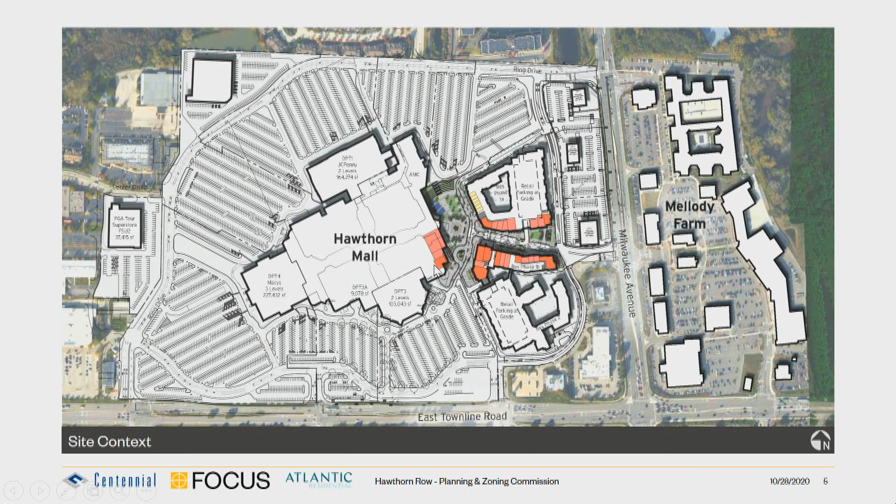So Torti Gallas Partners became involved and did a bit of a peer review with the previous plan. We looked at a few different components that we felt, from our experience of creating these types of environments, would help improve the general layout and the framework.

First of which was trying to improve the mall visibility from the entrance coming in off Milwaukee. The one shown at the bottom of the screen is a critical vista coming into the new mall entrance. We also tried to create a better drop-off sequence located at the outward-facing retail of the mall, encouraging pedestrian connectivity, but moreover, trying to create a great placemaking district.

Wherever you have retail with housing above, it's really important to create outdoor spaces that are sort of outdoor living rooms for the residents upstairs. So we intentionally dogleg the buildings to create parks and amenity areas along the main street coming in. We also pulled the garage for Phase 1 - you see the line designated Phase 1 and Phase 2 - further east such that there's less vehicular traffic at the throat of the mall.

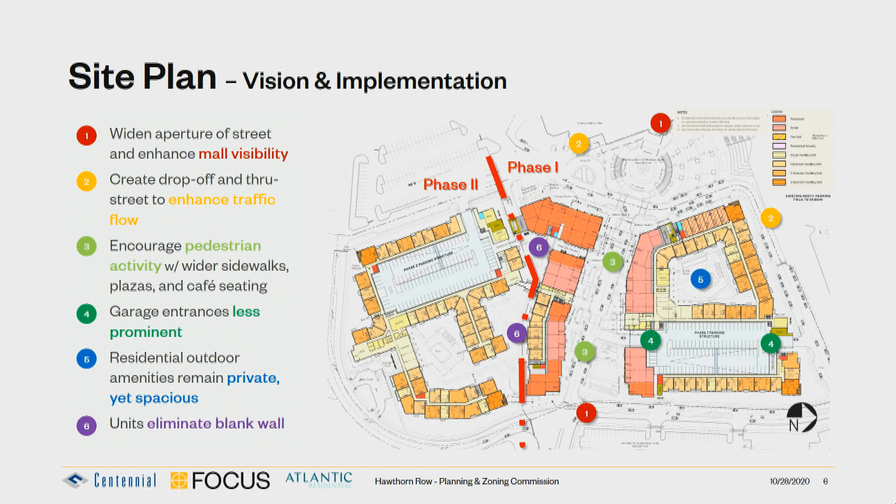We've also looked at the residential courtyards, certainly the one on the AMC side, closing it and making it a bit more private to the residents who will live there. And then lastly, the previous scheme had a more or less blank wall on the south side, so we've created a two-sided building there on the south side of our main street. And then you see the Phase 2 building on the left side.

So Phase 1 is composed of two buildings that are connected with a pedestrian resident bridge on level 4 across the main street. We studied this and tried to create a dynamic space that still has visibility of the mall signage and the mall tenants on the front of the mall.

Phase 2 then is taking over the parking lot that's south of the Phase 1 building, and we're incorporating another parking structure into that building to account for that parking. Phase 2 is connected via essentially a passageway here, so that the Phase 1 and Phase 2 buildings for residents will be linked, allowing folks to come out and engage the main street.

So what you're seeing is the red, the darker shaded red, are what we anticipate being restaurant users, mostly the end caps, and the lighter shaded pink would be retail shops. The yellow is basically representing ground floor residential units, and on the west side... can you guys see the cursor? Yep, okay, it's hard to see up here, so I apologize.

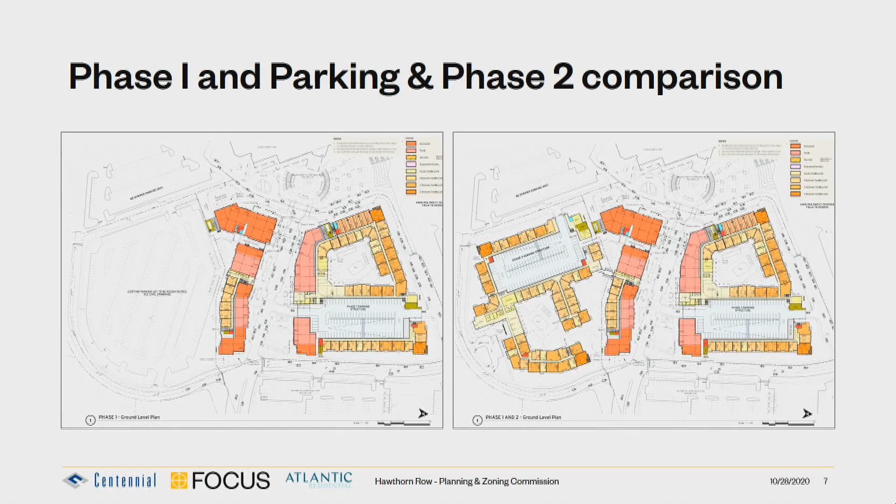So we looked at a lot of precedent images to have a dialogue about what these buildings would want to look like. Mellody Farm across the street is more of a traditional sort of adaptive reuse.

The mall itself is a bit of a blank slate. Since we're taking down the Sears, we can create what we want on that facade. The image highlighted in yellow really resonated with the design team and the development team in terms of being a quasi-warehouse building with a contemporary bent to it. So we felt this would work in this area given the context of what's around the property.

And in that you see - sorry, my mask is sliding - you see some larger window openings, which will show up in the renderings. And then the notion of an expansive glass, which shows up in a couple of places, both in the Phase 1 and Phase 2 building, to try to go more in a contemporary type of approach with the design.

We are not this tall, so the building doesn't look this tall. We are 4 stories instead of 6, but this was the image that we felt resonated most with everyone.

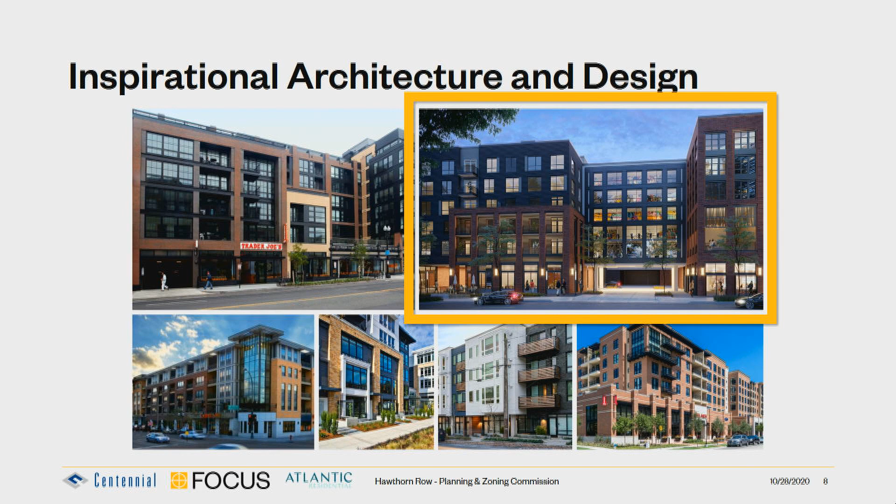In terms of the materials, we looked at a lot of different things, but we came up with a palette that we feel is durable. We've got essentially four different brick types.

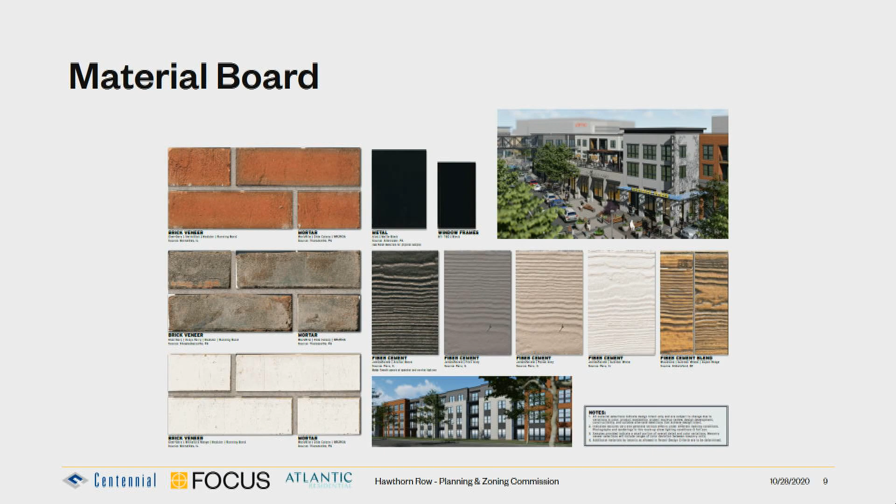So we have a series of 3-story pavilions, some of which are the white brick. We use the red brick, which you'll see in the renderings, for the end caps of the building primarily. And then we use a combination of the fiber cement panels - a dark panel, medium gray, light gray, and off-white - and then what you're seeing that looks like wood. This is essentially the underside of the soffits, so it's sort of a warm tone as you're walking down the street.

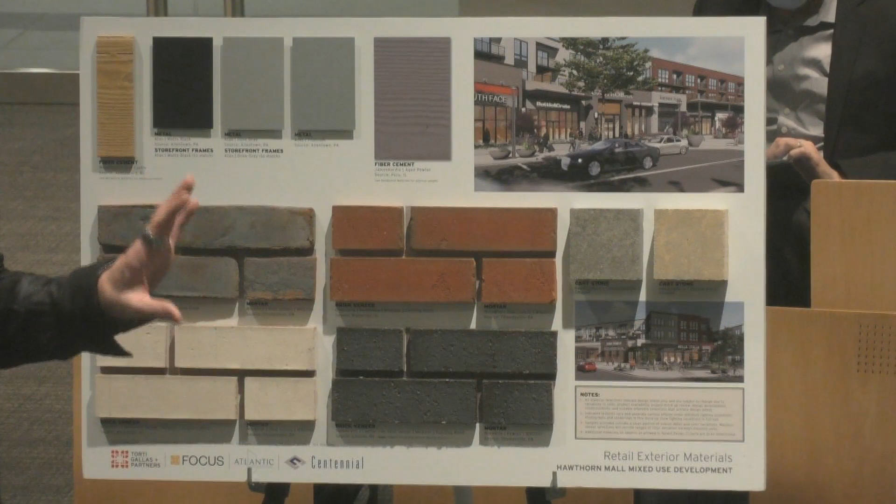So the palette is pretty simple, I would say. But what we've done in the architecture is tried to break it up so that as you're walking, you engage different facades along the way.

So in terms of the public realm, I guess I can turn this off. We had a series of images that we looked at - again, precedent images, things that are already built elsewhere that resonated with the team in terms of the environment we were trying to create.

So you see landscape, you see hardscape, you see really great places that you want to be, and it's all of those details that come together. It's the pots, it's the lighting, it's the signage - it's all of it coming together to create a great experience for guests and residents alike.

In terms of placemaking, you'll see we have a grand plaza in front of the new mall entrance where the Sears stands today. The notion is great outdoor spilling cafe tables, a rich landscape palette, paving materials, and amenities throughout, not only on the street itself, but within the residential courtyards as well.

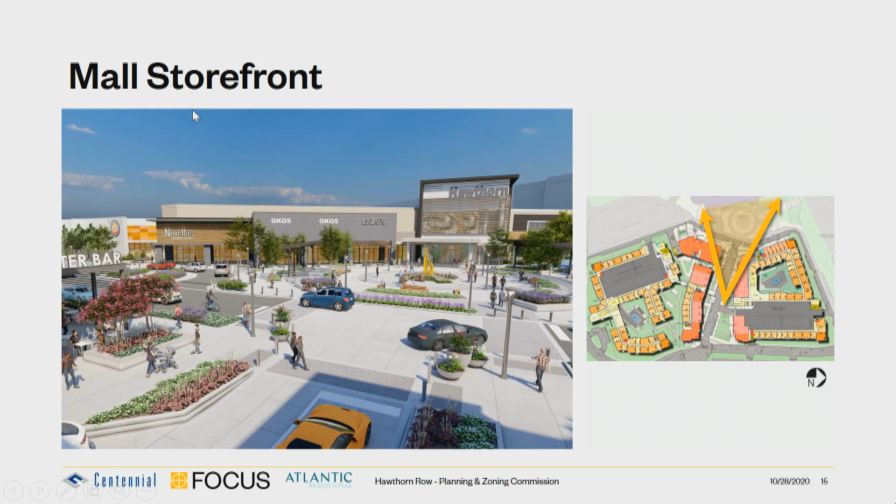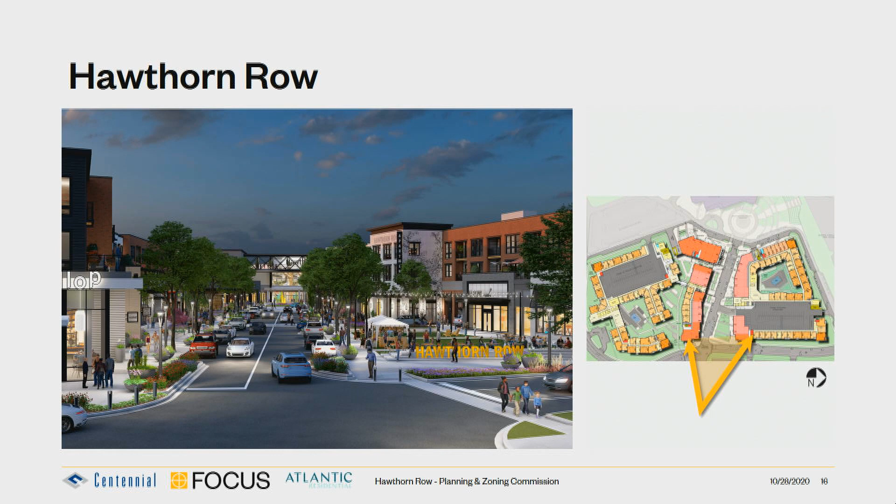This is coming a little bit closer in, and this highlights the multifamily entrance and lobby on the right side. We do have a vertical sign, maybe the notion of a painted sign as well, which would be a marker for the apartment, whatever that name ends up being. And then you see some mural, some artwork along the side.

This is the entrance into the garage, which has been pushed back further east down Main Street than previous. And this is the protected pedestrian pathway leaving the garage, coming out to the leasing office and down the street. So it's really, you park the car once and you're able to stroll past the shops on your way to the mall, versus the old plan, which had the garage much closer to the mall, therein kind of missing the shops if you're going to the mall.

And then you see, again, lots of landscape, lots of pots, some great pedestrian scale light poles, and you begin to see the terraces up above. This terrace here in particular is a community terrace for the residents. The other terraces on the other side would be private terraces for the residents who rent those units.

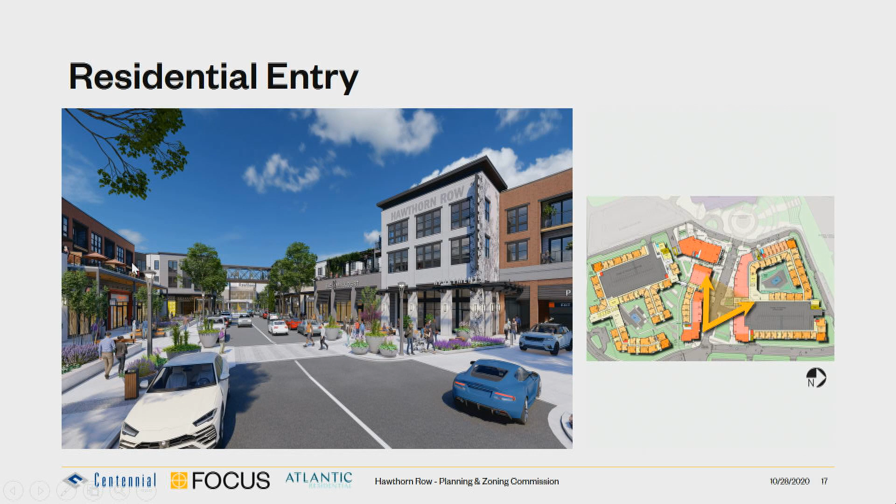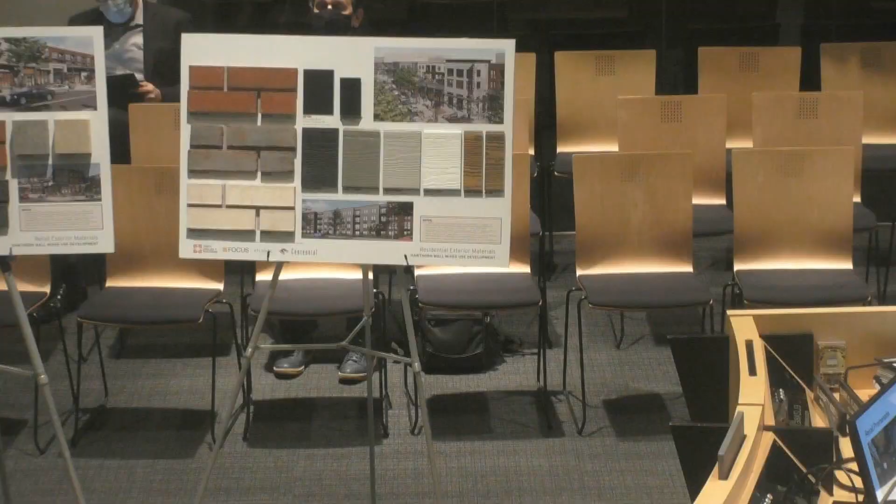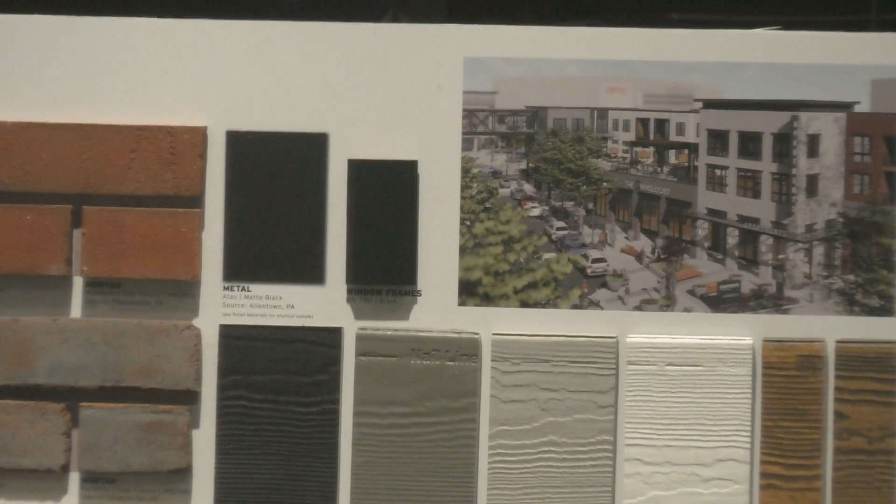And that was what I was talking about here, that would be this material with recessed downlights, and that's common throughout the project. Tenant blade signs as well, located here. Great storefront signage, and really just trying to create an active sidewalk, one that's populated, one that can have cafe, flipboard signs, and a very rich environment with plenty of seating along it.

So we switch now to phase 2. For orientation, out here would be Milwaukee Avenue, and this is the main street coming in. So this is really an aerial from the corner of Town Line and Milwaukee, looking northwest. And this highlights the phase 2 building.

The exhibit earlier that showed phase 1 versus phase 2 showed that this is a surface parking lot until phase 2 is built. So in phase 2, again, we take the front side, which really becomes a courtyard experience once this is built. And this little drop-off sequence here is for the phase 2 building.

You notice the entrance to the phase 2 multifamily product is very similar to the entrance to phase 1. So there are cues along the way for folks who are trying to navigate. Obviously, there will be wayfinding and signage as well. But we thought it important to try to create architecture that didn't feel like it was two different projects, but something that was more holistically designed.

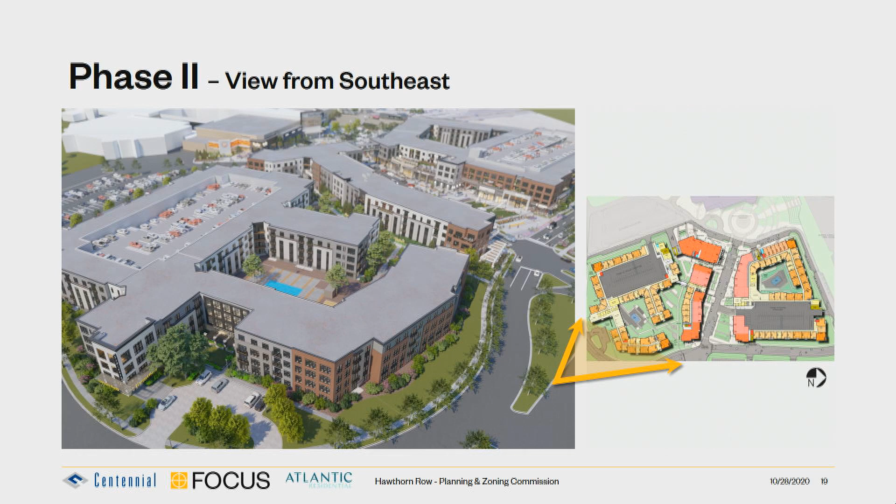Now we're going to turn around a little bit further. So this is more of the entrance coming in from Town Line Road. Again, the use of the red brick, the more traditional look, but with larger warehouse openings on the corner of the building located here. This is the drive lane coming into the new mall drop-off, located here.

But what we've done is we've updated, we've added a lot more of the lighter color Hardie panel to get it to pop a little bit, which I think plays off of the darker gray Hardie board or fiber cement and the red brick nicely. So it has been sort of freshened up, updated a bit to have a little bit more punch, a little bit more contrast as well.

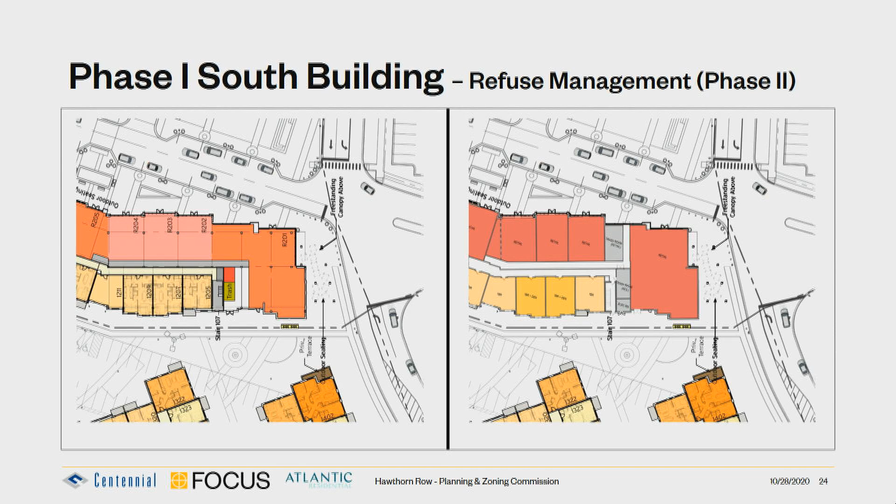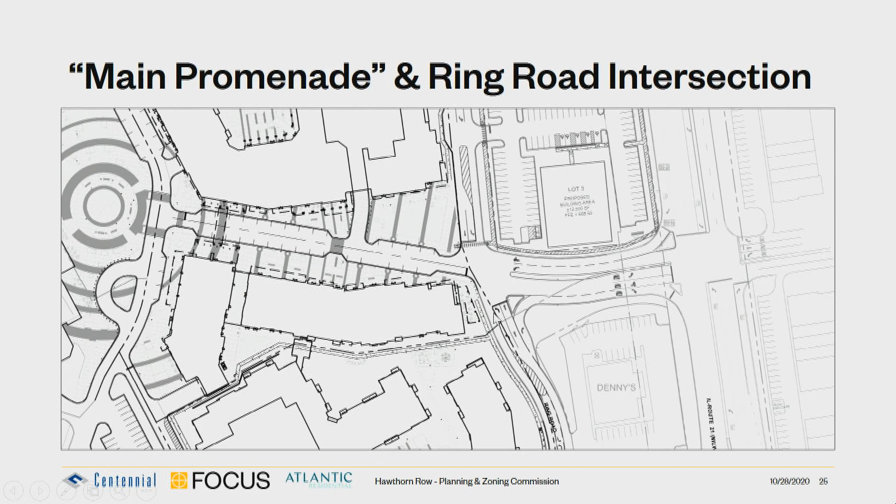With all the things we've heard today, we ask for your recommendation for revisions to the special use permit to grant a PUD modification, the variation to the zoning ordinance and sign code identified in the staff report, as well as preliminary and final site plan approval for Phase 1, Phase 2, and the main mall plaza, as well as preliminary and final landscape and architecture for the same elements. Thank you.

Okay, anything else from your standpoint at this juncture? That'll conclude the presentation from us. Okay, any questions from anyone on the commission? Jeff?

I just want to say I think the project's fantastic. I love the pedestrian experience you've created, not only for the mall, but for the new residents and people visiting the new little main street there. I love all the terracing, just from the ground up, and then the private terraces for the apartments. I think that's great—it's going to be a phenomenal experience for those residents. You've got the two different private courtyards for people who want a little more privacy, even the terracing from the theater down to the little band shell. There are all these little nuances that are really going to make this project successful. I think as a village, we're pretty lucky to have this here. It's probably the nicest project we've ever seen, probably also in the county, and probably beyond around here.

You know, this is amazing, by the way. Thank you. It's exciting. Is there a way that at some point something can be built to connect this with Melody Farms, without having to get in your car and drive over, or try to run across Milwaukee?

Well, one thing we do have in place is something we contemplated at the time of the Mellody Farm development, which was connectivity between the malls. At Ring Road and at the access drive adjacent to Denny's right now, those intersections aren't making any sense.

At the time of the Mellody Farm development, we required that an escrow account be created, with an amount of about 100 or 150,000 deposited into an account the village holds. In the future, when the mall redevelops, which they're doing now, that money can be used to reconfigure those intersections for more logical traffic and pedestrian movements. Our village engineer is working on approvals through IDOT concurrent with the development being presented tonight.

What about some type of pedestrian bridge that can take people over without having to get in their car? That's probably really expensive. There's a couple things to consider: ADA compliance gets in the way, since you'd need an elevator on each side, or trying to keep the pitch in compliance with ADA requirements. It takes up so much land space that it becomes impractical, and the cost involved would be quite steep.

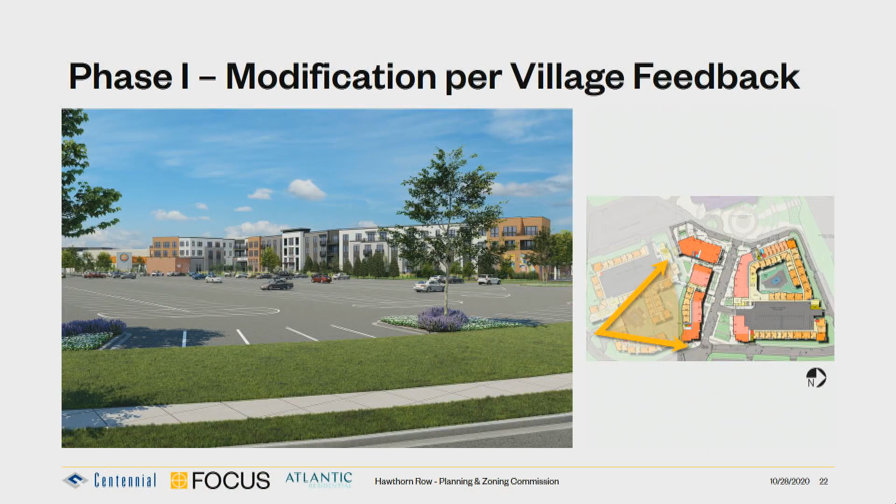Could you show this picture again, without the overlay in the middle of it? Which one? The picture without the overlay. Nobody explained to me how to do this. But there's only two ways to go. I feel good about what's going on, and I like having Vicky with me. Whoop, back one more. There you go.

Phase 1 is the building on the right -- is it also the first building on the left? It's the entire building on the right, and also this leg of the building on the left. The intent of the combination is to create the full Main Street for Phase 1. If we didn't build this building, you'd have half of a Main Street and wouldn't be able to create the place for retail. The bridge that the other commissioner was concerned with is in Phase 1, and the primary purpose of it is to allow residents on this side, call it Phase 1 South, access to the parking garage on Phase 1 North.

Speaking of the parking garage, will the residents have reserved parking? Yes, they will, it'll be assigned. Is that general parking for the mall also? The first floor will be parking for the retail. And then they'd have to use some type of access badge or gate to get in? Yes, okay, perfect, thank you.

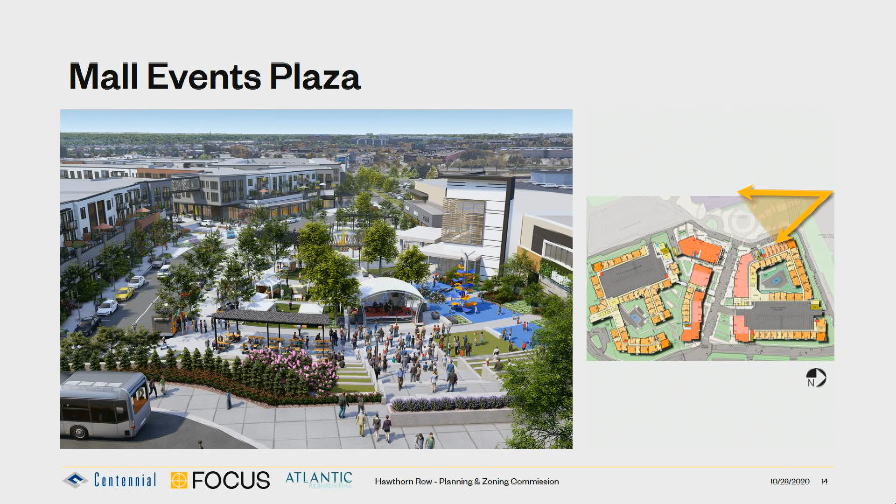Thank you. Okay, do you have a copy of the staff report? Yes. With you? Yes. Since you're asking for variations and we need to have a record of that, if we can just go through those quickly.

The first thing we're asking for is a variation on dwelling unit size. We had a substantial conversation, I guess a week ago, on dwelling unit size as it relates to the ordinance. Your proposed one-bedrooms are 38% less than the permitted. The two-bedroom is 25%, and the three bedrooms, which I know are not a lot, are 18%. Can you speak to either A, the necessity for these kinds of sizes, or B, the outmodedness, if that's a word, of our ordinance?

So as we've developed many hundreds of units over the past decade, we've come to realize that today's generation requires less space because what they desire more is the amenity space. And they like to be out in the amenity space with their neighbors interacting. And so from a price point perspective, this allows the younger generation who can't afford the larger units to pay a smaller chunk of rent for these smaller units, but yet market size and yet manageable. And you'll see in your packet, I believe, the units have been designed efficiently so that it allows also common area within the units, like a built-in desk, a true living room, so that they can actually feel like they have more space.

These are predominantly one and two person households. Is there a cross easement for parking into the mall lots? Yes, there will be a cross access for parking. There's also a variance for the blended parking ratio for retail and restaurant uses.

Currently, the blended parking ratio is 5 spaces per 1,000. We're requesting a reduced parking ratio of 4.41 for phase 1 and 4.16 for phase 2. Those again are market driven.

If you've been to the mall recently, it's evident, I mean, maybe pre-COVID, we won't say recently, but pre-COVID, it's evident that the 5 per 1,000 is not what is needed. When you have a mix of uses, people are not going to the mall to go to a single retail tenant and then driving around and parking to go to another retail tenant or a restaurant. The idea with this redevelopment in particular is to park once and create an environment where people can walk and visit multiple uses using one parking space.

Mickey Walker, civil engineer. So the front yard is Ring Road, on probably the just east side. For this version, the front yard is actually to the south in the smaller map. And then the rear yard is typically along the mall plaza. They slightly vary for each of them.

For the ratio of building coverage, we are requesting relief for both Lot 1 and Lot 2. Lot 1 is your Phase 1 residential. Lot 2 is your Phase 2 residential and also parking field during the Phase 1 condition. Largely, those reductions in the ratio, or the increase in ratio, I should say, is because we're trying to create a more urban environment. Instead of having a massive parking field, we're trying to park within the garage, so therefore the building coverage is greater.

In terms of the setbacks, we've placed landscape beds to the extent possible in order to get the density we're looking for within the apartment buildings. These landscape beds also include sidewalks for pedestrian connectivity, as well as different amenity spaces, especially along the main street, to allow for more congregation amongst residents.

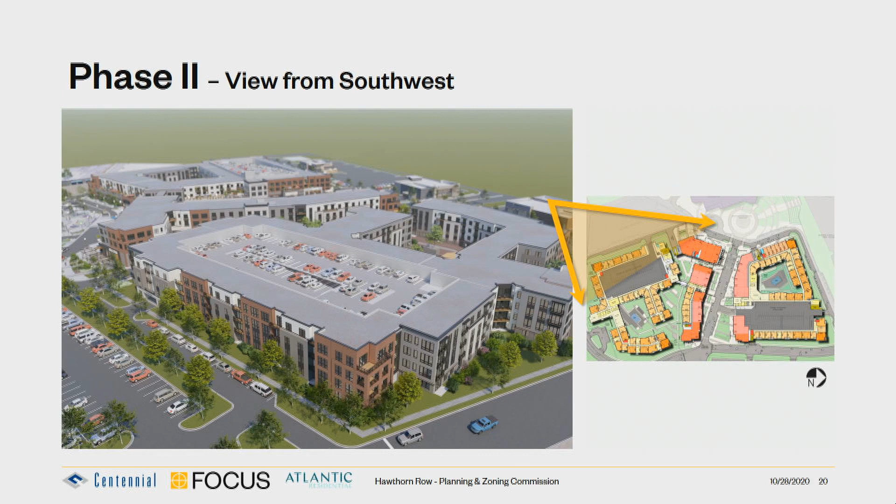And then in order to create that urban feel, we are asking for relief for the building height. Per code, we are permitted 2 stories. We're asking for 4 stories to create this density.

What is the height of the mall? Mike, do you know the height of the mall? It's a 2-story mall, so the mall is 2 stories. It's going to be lower than the 4-story buildings. I don't know what the floor to roof measurement is, but it is a 2-story mall. The department stores are 2 stories, and you're looking at a 4-story residential, multifamily building.

Yeah, I should have looked this up, but I know the AMC movie theater is somewhere a little bit above 50 feet, is what my memory tells me. And then if they can find the right screen, I think it'll give you a good perspective of what it'll look like. Throwing the dimensions out, because of the grade change between where the movie theater is and where the development is, the movie theater will remain looking like the tallest building on the mall. That's a great point, that the grade of the upper level parking lot and the movie theater is significantly higher than the intersection, the main intersection.

Okay. What about the sign code variances? What are you asking for there?

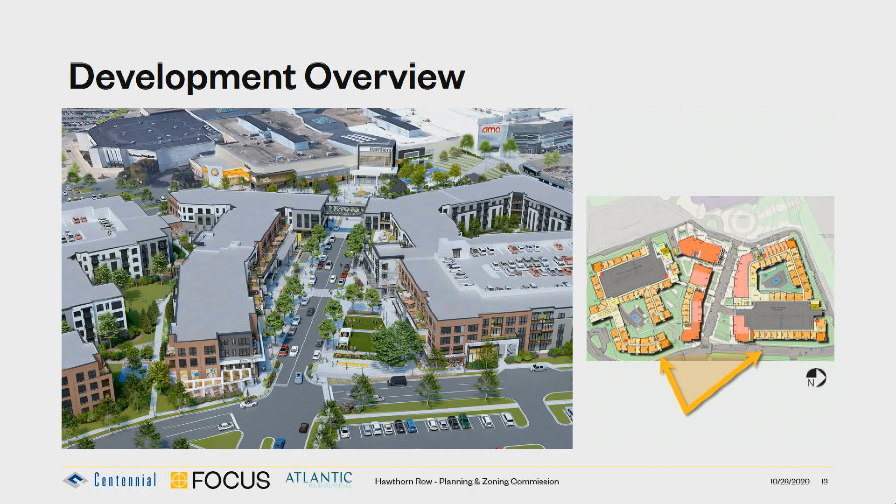So we created this signage package looking primarily at retail tenant signage, much like at Mellody Farm, needing an increase for the retail tenants in terms of the size of the signs, what they're going to be expecting in a property like this.

The other thing, I don't think we increased... haven't seen it in a bit, but I think it was about a 50% increase in some of the signs. Do you have the staff report? Yep, well, you do now.

And then the other consideration was for the end cap tenants that are on a corner, to allow for signs on both of their facades versus just one facade.

We're also looking at a variety of signage that will be building mounted and awning or canopy mounted as well, such that it has some relief. So we have blade signs, which show up here. And then on some of these canopies we have signage, and others would be surface mount, internally illuminated signage for the shop fronts.

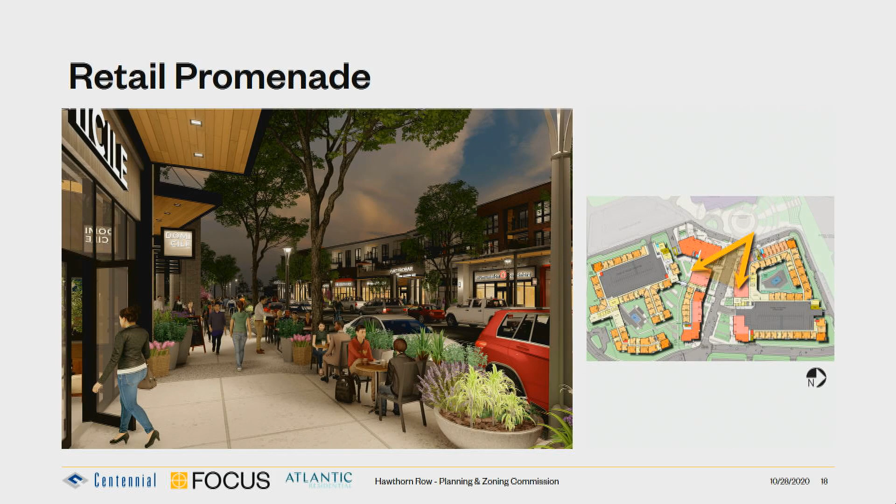We're also asking for open channel letters, a little more. I think in these types of environments, the more variety of signage you have, the more authentic the place feels, versus having a criteria where every sign appears as though it's the same sign.

Not it, wrong package. I'll get rid of this. It's not forwarding. Oh no. Uh-oh, you broke it, broke it. We're gonna have to wait here now. Oh, there it goes.

So this exhibit here shows the different types of signage that we're hoping for, and we hope that the tenants express their brand through the signage.

We'll go back to that one. Are you suggesting, though, that the retailer on the right would have one, two, three, four, maybe five signs? No, these are just different locations that their sign could exist within.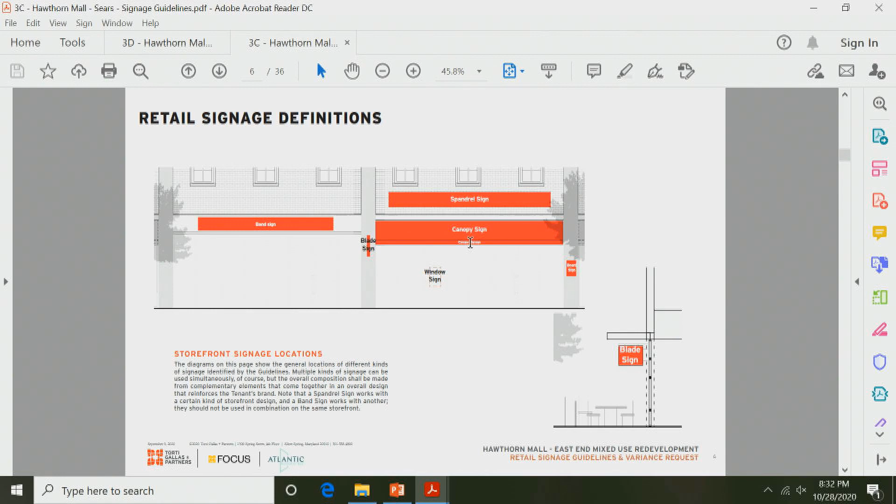So then when you say to allow more than one wall sign per tenant facade, you're talking about multiple signs per facade? For the tenants that are on the corner of a building, although their primary entrance is on one side, they may have entrances on both, so we're suggesting that they would have a sign on either side. That was typical, but that's one per facade. One per facade. But this reads more than one. That's what I didn't understand.

Vicky, could you get to the screen that shows where on the facade a sign is permitted to be located? They have the elevation. I think I can help out a little here. In the back, it's window boxes on the screen. Is that the storefront? It may be, and it's in your packet as well. Corner unit, there it shows.

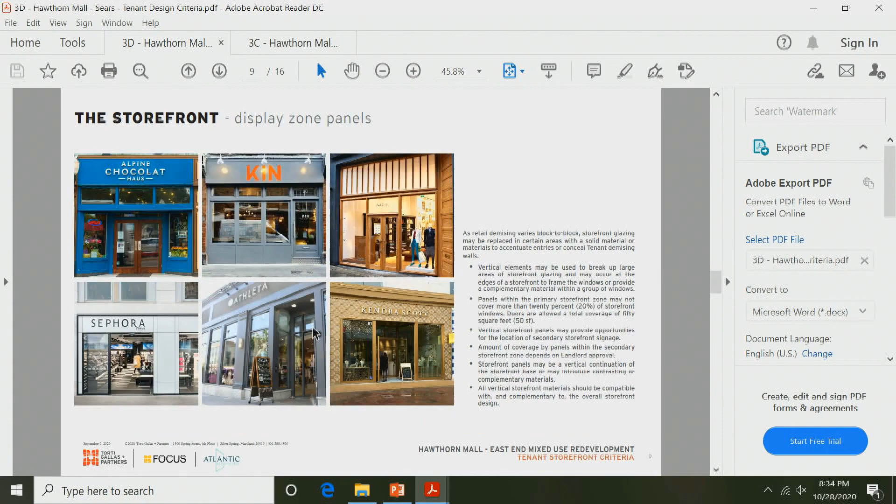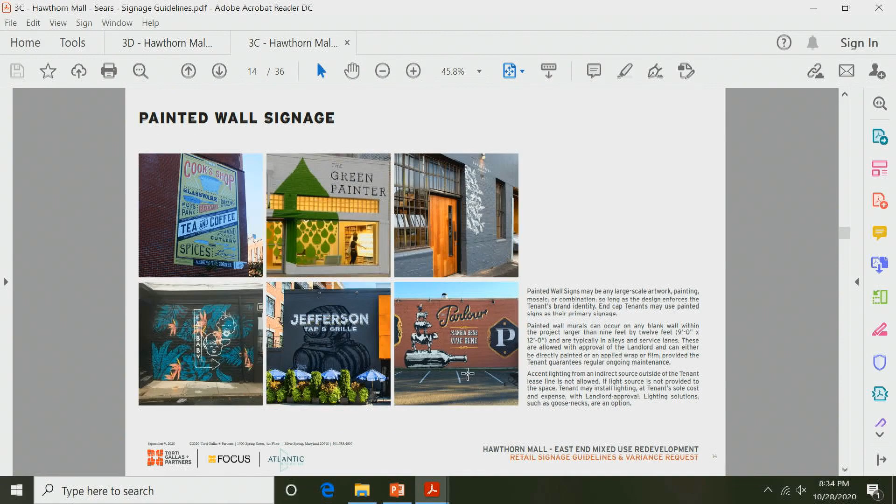The pictures just illustrate what's encouraged and discouraged. Did I pass it? To me, I think we need to flip back. I'm sorry, Mickey. 21. Oh, I can't see the page. Oh, here we go. There we go. 18, 19, 20.

There we go. Okay, can you get a little more of the streetscape involved so we can see more? Each one of those boxes there, that's the specific area where a sign can be located. There can be one sign within those defined locations. So there could be a situation where there's a wall sign outlined in red, and then if they happen to have a canopy sign, there could be signage on that as well. But it's not to say you could have unlimited signs. Right, so it's one sign per defined location.

In addition to that, a window sign or a blade sign would not count toward the overall size limitation, because from staff's perspective we think blade signs are cool. And then there's also some allowances for sandwich board signs, banner signs, and other such temporary signs. But it's not to say you could have that many signs on each tenant elevation.

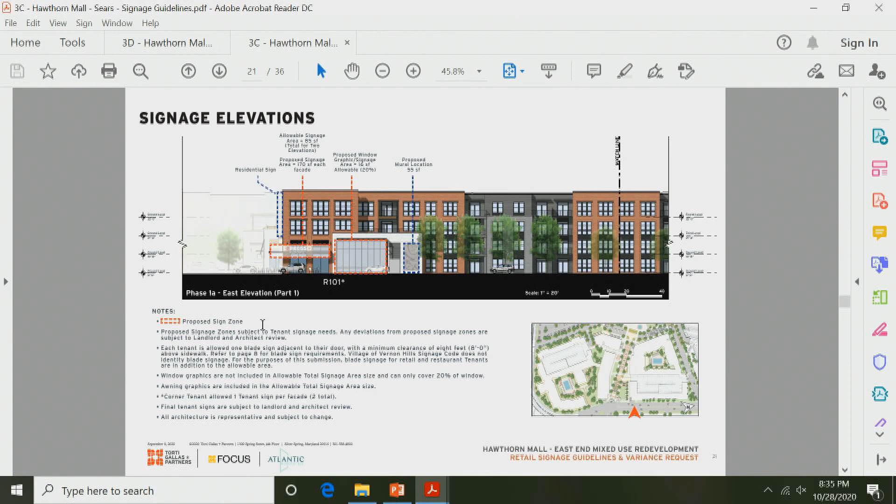But if we approve this, are we approving multiple wall signs per facade? I can answer the question simply: no. It would approve one wall sign per facade, and it could also, not in all cases, approve a blade sign and an awning sign. So in the staff report where it says to allow more than one, it's really to allow one wall sign per tenant facade, is what we should approve.

Yeah, and maybe the wording could have been better on that, Chairman Morris. But yes, it's to allow more than one sign as part of a facade. Okay, we never blame staff, it's always the petitioner, so don't worry.

There's one exception, with the tall blade sign - is that permitted? There's two on that one, and on the four-story right there.

Actually, this is the residential entrance, and this is a little misleading. This sign here is actually a canopy sign, and above here is the wall sign, and this is a blade sign. Right, that was the one that had it. Okay, so we're okay then?

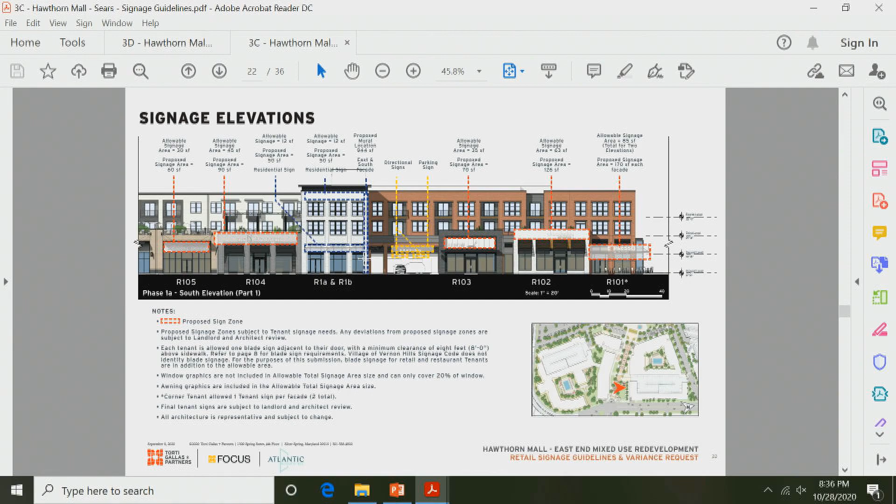So, wait, so the retail can have a wall sign on each facade. It can have window signage, it can have a blade sign, it could have canopy signs, both on the canopy and on the front of the canopy. I personally think that's way too much signage for one business.

I'll let the petitioner answer the question, but I'll provide this for informational purposes. The staff, as part of the review of the sign criteria, were happy with the way the sign criteria plan worked out for Melody Farm. So we pushed and pulled and tugged them toward that plan and encouraged them to come up with a sign criteria plan similar in terms of number and size of signs, and then add the particular design requirements for this development.

I'll let the petitioner speak. I'll just say, as the retail developer, the blend of flexibility which the document gives, with the actual enforcement by us and by the village of the individual retail businesses, is really what makes this work as a document. It's not throwing everything up against the wall - that doesn't serve us and it doesn't serve the village. But allowing flexibility for the retailers to express themselves in different ways that match the intent of the document is what we're trying to do. We do have a vested interest and a responsibility to adhere to the spirit of the document and not abuse it.

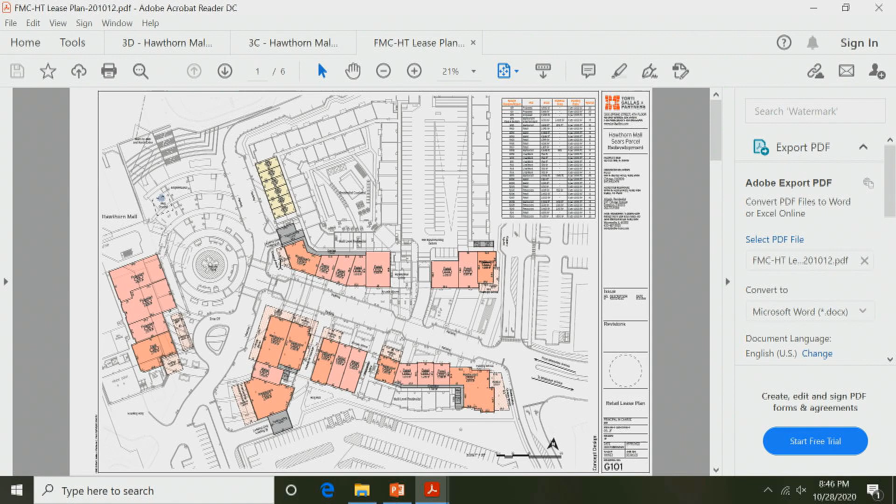Good, we've tried to address that, that was one of the things we looked at earlier on when we moved the entrance to the garage further to the east, is how to protect folks from the environment.

The one thing that wasn't mentioned, just so we have it in the record: do you have proposed rentals for these units?

Do you have proposed rental amounts for these residential units? The smallest unit would be around $1,700, and the largest would be $3,200.

What is your target demographic for the residential? Based on what we've experienced at the Atworth, we're expecting about a 50-50 split between young professionals and empty nesters.

What about professionals with children? How many children do you anticipate? Based on the TESCA report, there was a projected amount, but based on staff's recent calls to the Atworth and Milton, there were about 3 school-age children each property. The Atworth maxed out at one point at 5 or 6 kids, that's the most we had. I think they maxed out at around 10, but some of them were transfers from other buildings already in the school system.

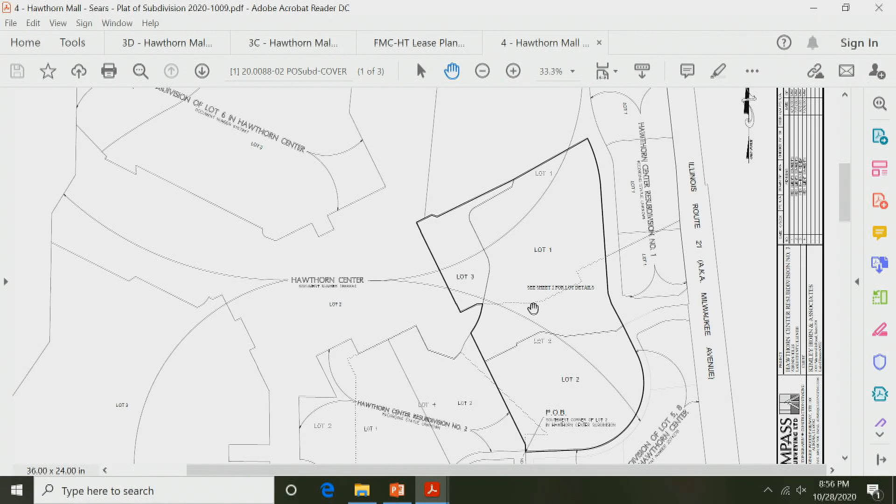Where I'm ultimately going is, are we going to ultimately have to reach the point where there'll be some sort of common area maintenance agreement between all these entities? Yes, whatever these entities are. We are working on that agreement, and we need that agreement. One thing I'll tell you is the company I work for is in the middle of every agreement. We are part owner of every lot other than the Macy's and the J.C. Penney lot on the campus. We bought the Sears and we bought the Carson's, so we control all of the action on 1, 2, and 3 that you're referring to. We are, in essence, entering into easements with the other partnerships that we're a part of. So yes, we do need easements. There are controls that need to be put in place, business arrangements in terms of ongoing maintenance, the fees associated with that maintenance and the upkeep of the property, along with parking, the rules that will govern the parking, rules that govern the utilities, the maintenance of those utilities, et cetera.

Okay, all right, anybody else? The only other comment is, I was asking about the walkways from the AMC Theater down to the main mall entrance on Main Street now. I just feel that, I'm always a sucker for water features, and I kind of thought that would be a great place to have put a waterfall type feature in there. But that's just my feeling on that.

The other thing I wanted to comment on, I know we're looking for preliminary and final plan approvals on both Phase 1 and Phase 2, and I thought it might be worth a suggestion to just do a preliminary on Phase 2, in case we find out after Phase 1 we don't like something, we can adjust it.

From staff's perspective, Phase 1 and Phase 2 need to relate to each other, and we would prefer that design get locked in tonight. So if you have any reservations, speak up about it, but we would prefer both phases get locked in for approval tonight.

My reservation is still with the parking issues. I'm not sure that I can trust the studies that are being performed, especially after we got bit by Melody Farms. So I'm kind of leery of that. So I thought holding off on Phase 2 for a final would help solve that.

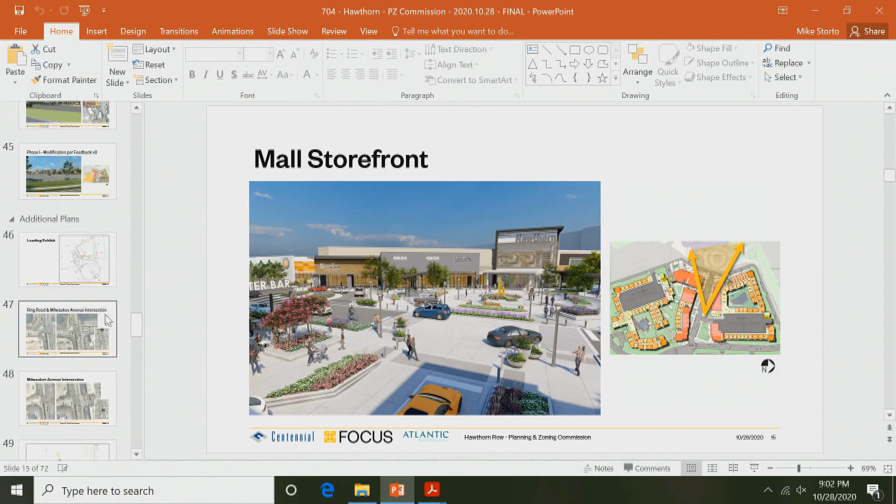Okay, we have a standing motion to recommend approval on this commission. So we would have a motion, but before we do that, let me ask the commission briefly: do we have, from a straw poll perspective, any consensus with respect to phase 2, whether it should be preliminary or preliminary and final? I know Jim says preliminary. I think it should be both, preliminary and final for both. I think that it should be as one. Yep, okay, all right.

So we have a motion to recommend approval to amend ordinance 2013-14 as amended, authorizing revisions to a special use permit, granting a planned unit development to allow for a mixed-use residential development, subject to the conditions of approval in the staff report, which are conditions 1 through 15, with the revision to condition 4, with the updated plat of subdivision. We need a second for that.

Second. Any discussion? All right, we need a roll call. Commissioners Heidner, yes. Mulcrone, yes. Gorig, yes. Baloo, yes. Cotton, yes. Hesner, yes. Chairman Morris, yes.